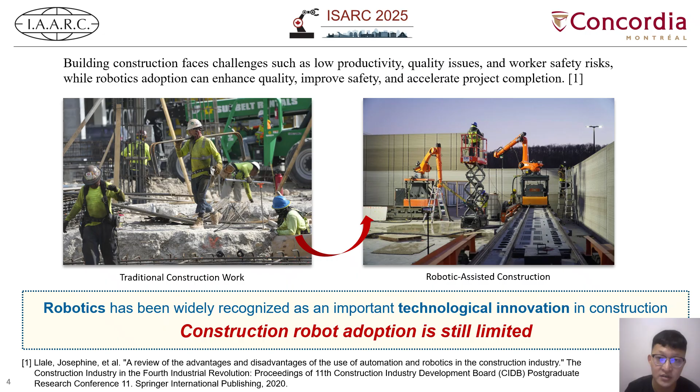Firstly, let's talk about the research background. As we know, construction projects often suffer from low productivity, safety risks, and quality issues. Robotics can help improve all of that, but in reality, construction robot adoption is still quite limited. What's the reason?

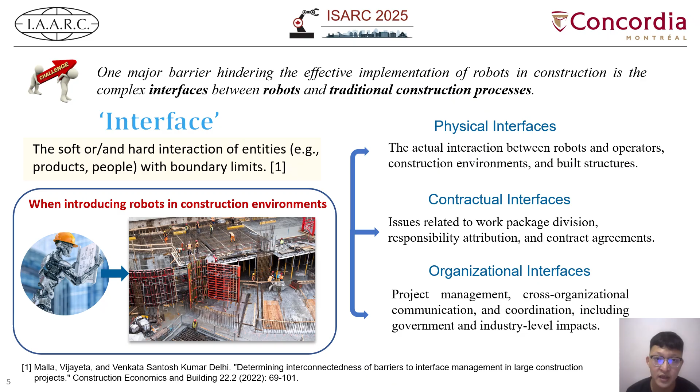One major reason is that when robots are introduced into construction sites, they inevitably interact with traditional building processes, and these interactions create new and complex interface issues. We can define an interface as any meeting point of two entities, products, people, or processes. And in this study, interfaces are categorized into 3 types: physical interfaces, contractual interfaces, and organizational interfaces. That's the starting point of our study.

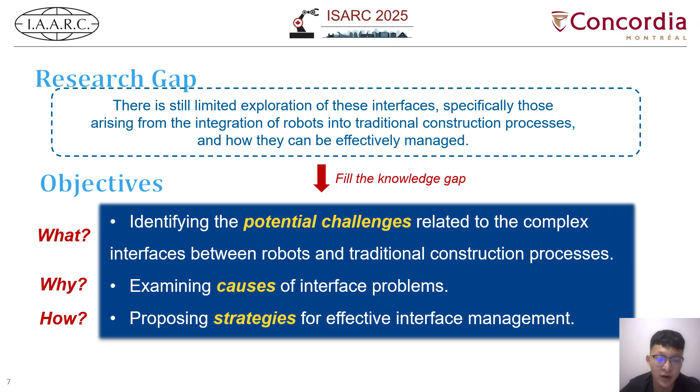So what are we aiming to do? First, we want to identify the key potential challenges that arise when robots meet traditional construction processes. Second, we examine the causes of those problems. And third, we want to propose practical strategies to better manage these interfaces.

Now for the methodology part. We use the PCO framework, physical, contractual, organizational, as our guide. First, we did a literature review on major databases, and then we conducted a case study with site visits, document analysis, and 7 semi-structured interviews. We also coded the data in NVivo software to find key themes. And finally, we held a focus group to validate and refine our findings.

The case we studied was a large-scale residential project in Macao. It followed an EPC contract model, and the mechanical, electrical, and plumbing, or MEP work, was handled by various subcontractors. To improve efficiency and coordination, the goal was to use a drilling robot to integrate all the MEP drilling tasks. This robot is semi-automatic, guided by a total station, and reads AutoCAD or Revit data. It only takes about an hour of training to start using, which makes it fairly easy to deploy on-site.

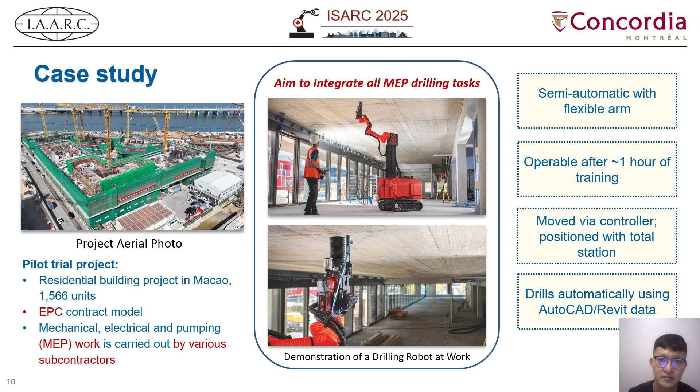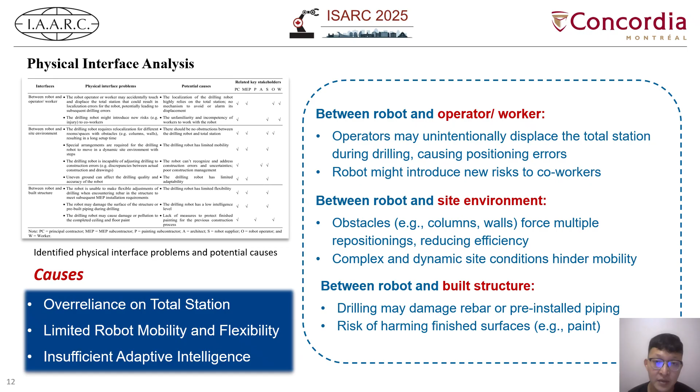Now let's look at our research results. Physical interfaces mainly arise between robots and 3 elements: workers and operators, site environment, and built structure. For example, if an operator accidentally touches the total station used for positioning during the construction, it can lead to drilling errors. Meanwhile, the complex and dynamic nature of construction sites can also reduce the operational efficiency of the robots. In addition, robots may cause damage to completed structures, such as rebar and finished paintwork.

Contractual interfaces mainly involve 2 aspects. First is the reassignment of work packages. Since the pilot project didn't have an integrated MEP contractor, tasks were handled by various subcontractors. However, as the robot took over the whole drilling process, it led to unclear contractual responsibilities.

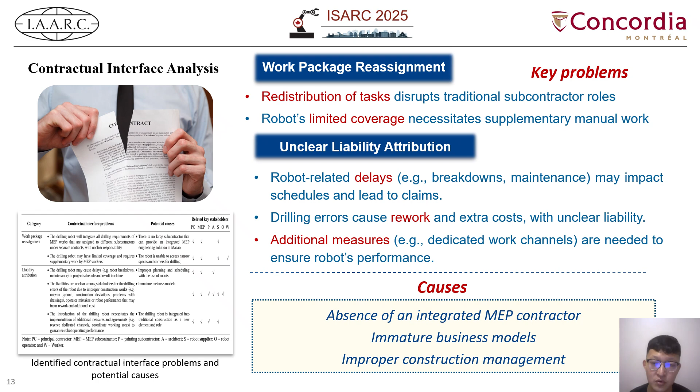And the second issue involves unclear liability attribution. When robots make mistakes, like causing delays, leaving rework, or requiring some additional measures, it becomes hard to know whether it is the fault of the technology, the operator, or the project team. These contractual interface problems are often caused by immature business models and inadequate construction management.

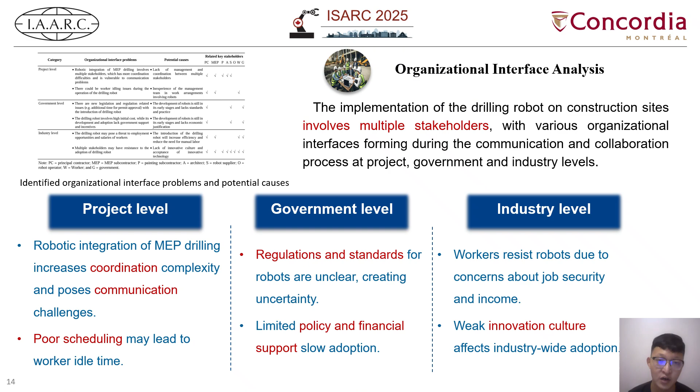On the organizational level, the implementation of the drilling robot on construction sites involves multiple stakeholders, so things get even more complex. This slide summarizes key interface challenges observed during the robot adoption. We have grouped them into project, government, and industry levels, highlighting issues such as communication and coordination problems between different organizations, lack of clear standards and regulations, and a weak culture of innovation.

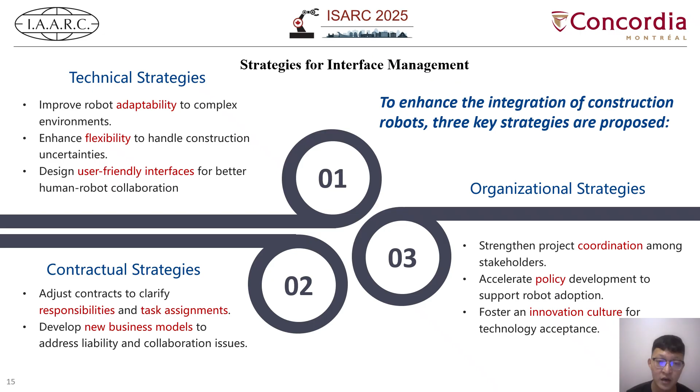So how do we manage these interfaces? We suggest three types of strategies. First, technical strategies. We can make robots more adaptable to complex environments, more flexible in handling on-site changes, and easier for workers to use. Second, contractual strategies. By adjusting contract terms, we can make responsibilities clearer and reduce disputes. Also, new business models can help better define collaboration and manage risks. Third, organizational strategies. This includes improving communication between teams, encouraging support from government, and building a stronger innovation culture.

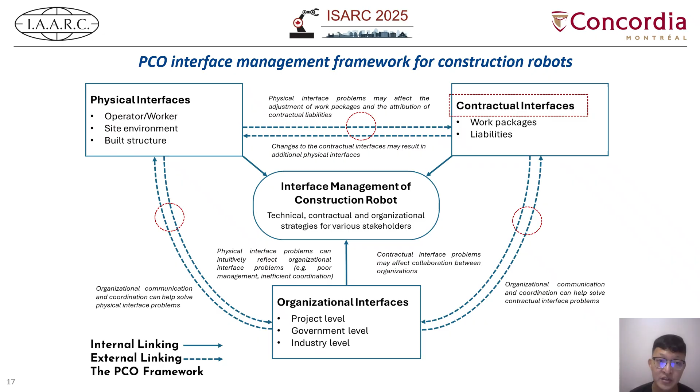Next, I would like to show some key findings from our research. Here we introduce a framework to manage interface problems for construction robots. It focuses on three parts: physical, contractual, and organizational, so we called it the PCO framework. The PCO framework summarizes the components of various interface issues and their corresponding management strategies, while also revealing the interrelations and mutual influences among these issues within the construction workflows.

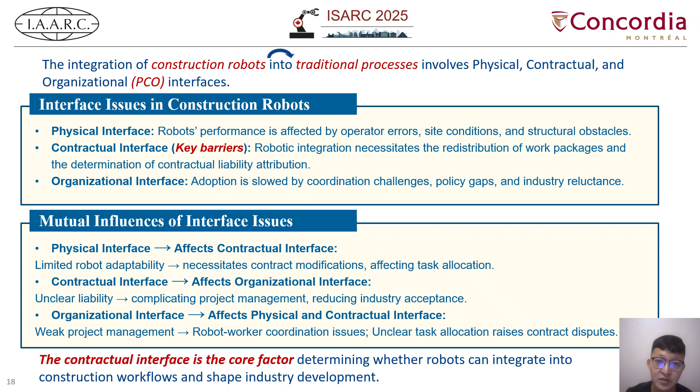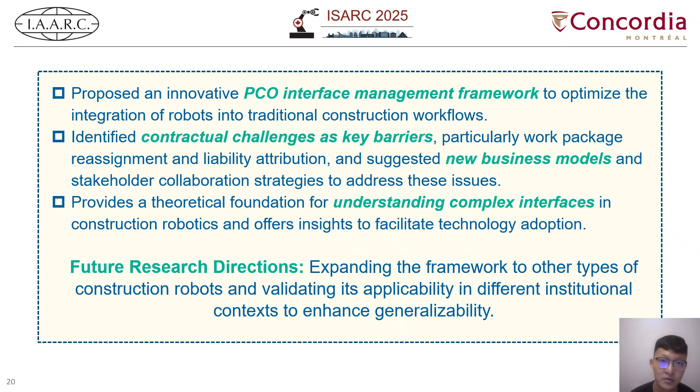So in conclusion, we propose the PCO interface framework to support the integration of robots into construction workflows. And we find that contractual problems are key barriers for robot adoption, and suggested new business models and collaboration strategies to deal with them. This research also builds a theoretical foundation for understanding complex interfaces and provides insights that can support wider adoption of construction robots. In the future, we plan to refine this framework through more case studies and on-site observations, so it can offer more practical guidance for robot application.